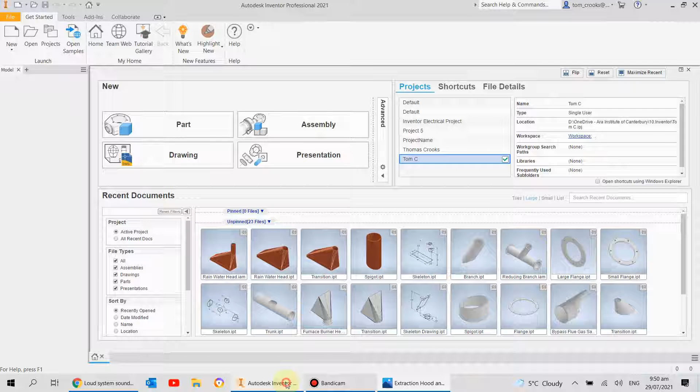This one shouldn't be too difficult, so what I'll do is go to Inventor, start a new sheet metal file, and I'll just break with habit here and change the thickness to 1.6 already.

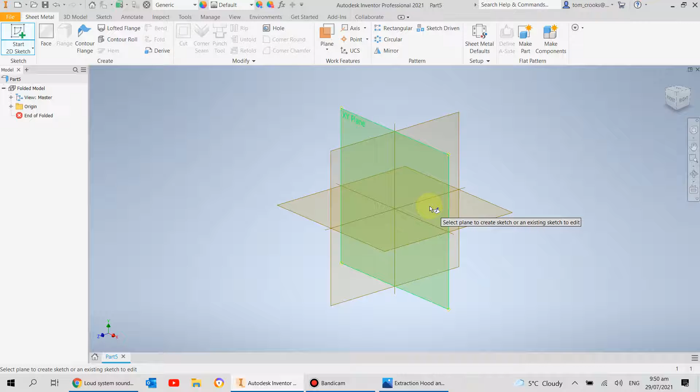Now what I'm going to do is draw a bit of a side profile, just so I can get the angle right for that plane up the top. We've got it 600, and 347 to the center of this spigot, which is 125 in.

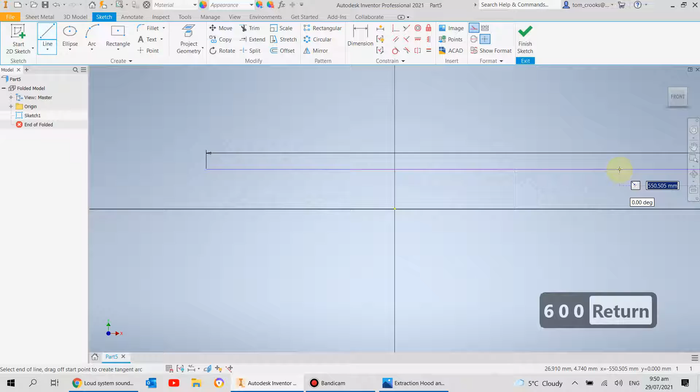So let's draw a line, I'll draw a construction line and type in 600. Zoom out a wee bit, and constrain the middle that way and that way.

Now I'm just going to draw a line for making a plane. I'll draw it approximately there, so it looks something like that. And I'll do 125 to the center of that line and 347 up.

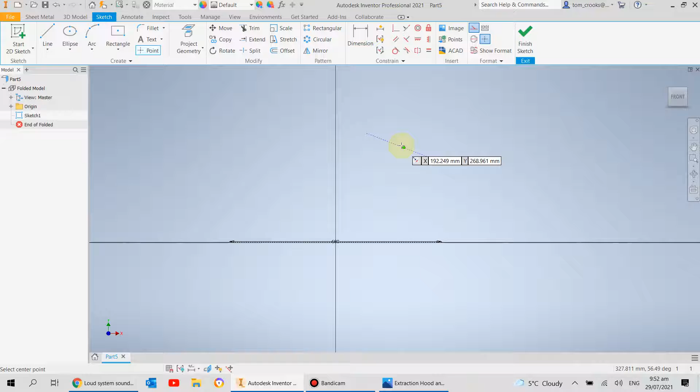What I'll do actually is, since it's not easy to pick up on the center here, I'll dimension to the edge instead. So we're talking about a 250 OD and 125. That is flush at the end, even though it doesn't look like it, so we'll just flush that up.

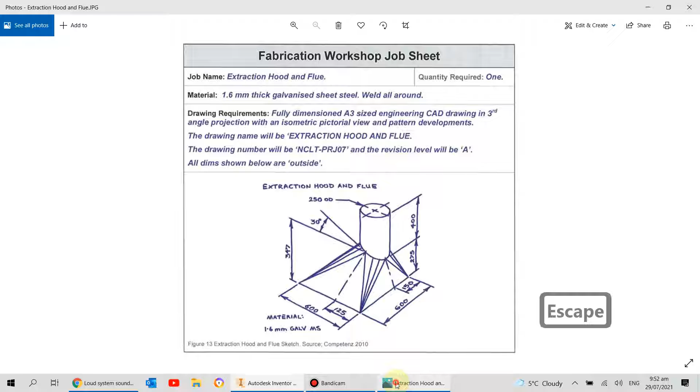Like that. And I will draw in a center point here, I'll just do a wee point. There it is. Just so I can dimension to the point.

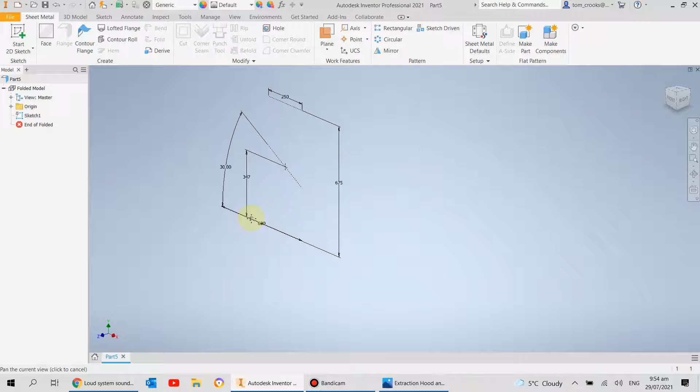So I'll go from that point to here, that measurement was 347. And the angle here is 30 degrees off flat, so let's put that in there as well.

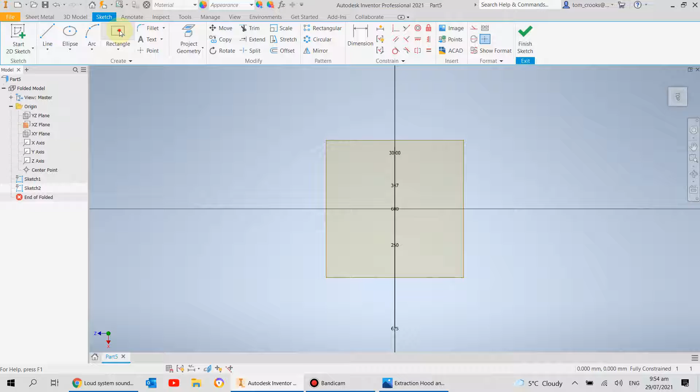I'll leave it at that for a second. Now I'm going to draw one more line across the top here, and flush up that end with the rest of it.

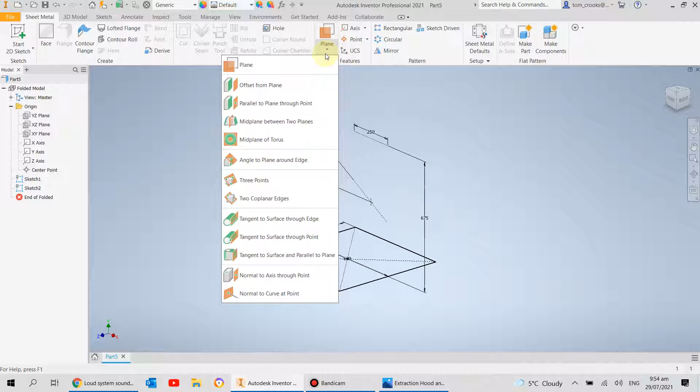And the overall height of this thing is 275 plus 400, so 675. So I'll go there to there, 675. And we had a 250 OD, so I'll put that as 250.

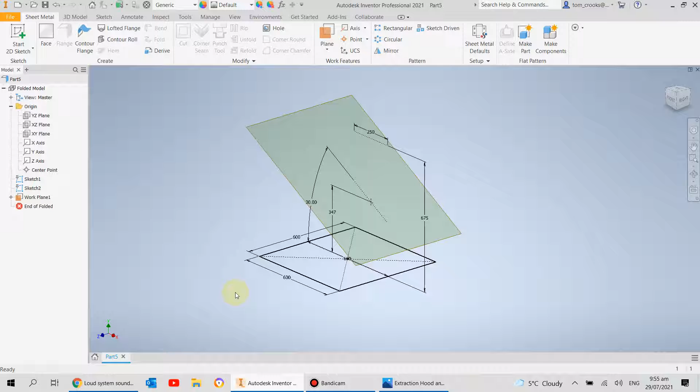Now what I can do is put a horizontal constraint here, a vertical one, and you can see that all lines up there, and that's on a 30-degree angle, 347 at the center. So that's good.

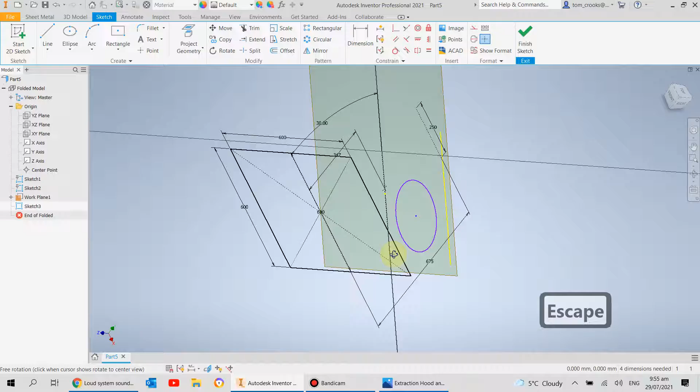Now what I can do here is finish the sketch, and now I can do some planes. The bottom one is already on origin, so I'll just highlight this one and sketch the bottom face. The bottom face is 600 by 600, and that's outside sizes.

Sketch on here, center point rectangle, 600, 600. So there's the base.

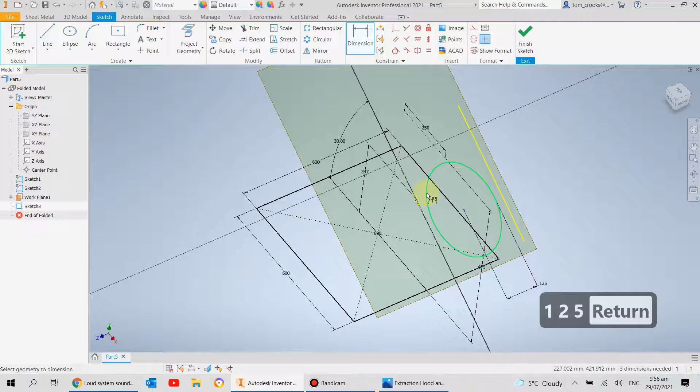Now we get a little bit trickier. I'll turn that off just for ease of view. I'll do an angled plane around the edge, so that's my edge, and I'll do an angle to this plane of 90 degrees. And what I need to do here is look at the drawing again.

So it's 150 from one end. So when I draw the center of this ellipse, it's going to be at 150. So I'll go back to this and I will start a sketch here.

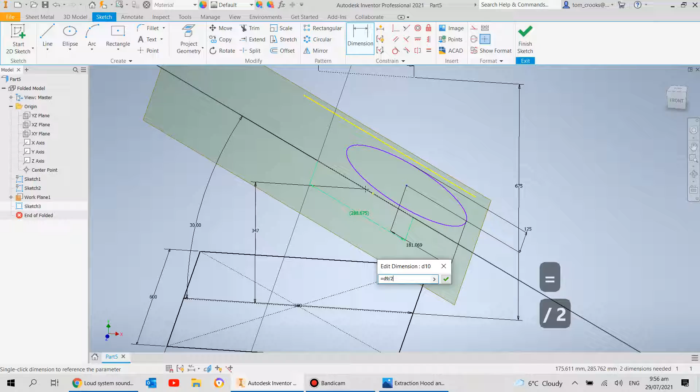And I can project the geometry, so I'll go here. And what I'll do is just roughly place an ellipse in here. It's going to look something like this.

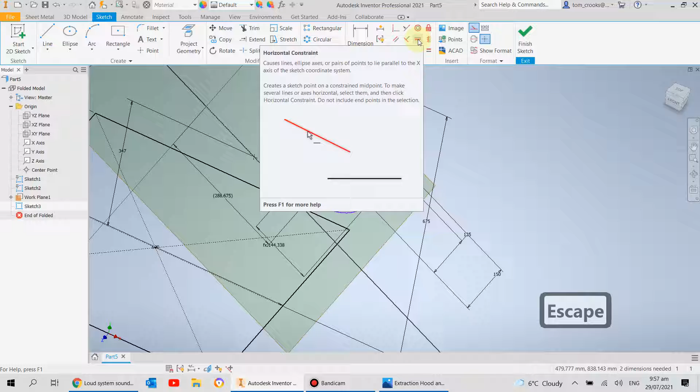Now I'm going to rotate around to see what's going on. And what I'll do is give this a dimension on the minor axis. What size pipe did we say? We're doing a 250, so 125.

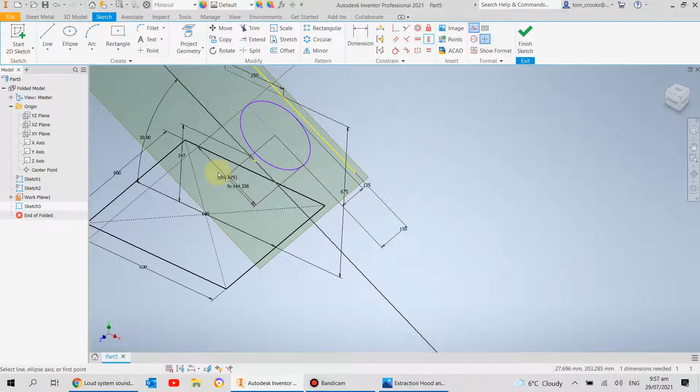And I will put it on the side just to make it a bit easier to see. Rotate around again, so I'm just getting a good grasp of what I'm doing.

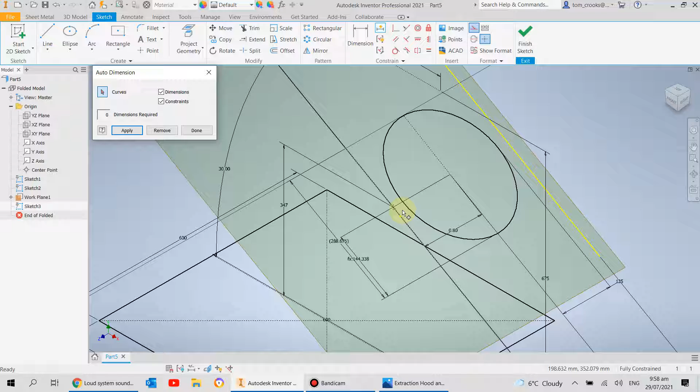Now, dimension. What we can do is we can project geometry, and we can then check this dimension here, 288.675. I'll accept that, and I'll go here, dimension it out this way, and I'll say it equals that divided by 2. So now we've got the right size, and now we just need to

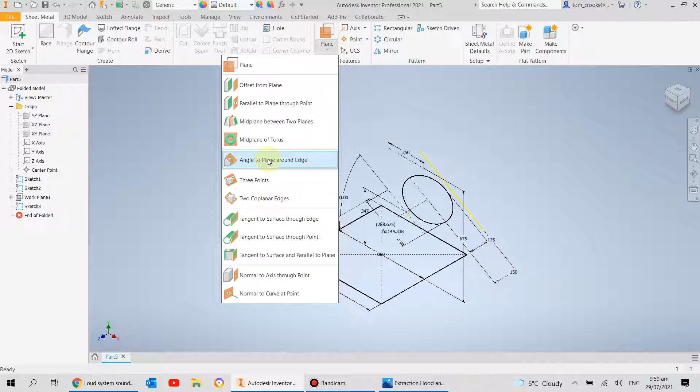constrain it to the right point. So I've already got it, no we don't, so I need to do 150 off that outside edge there, as it says on the drawing, 150.

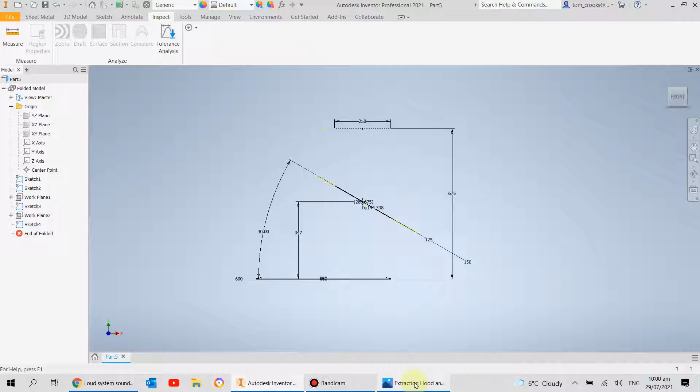And what I'll just do here is I'll do a construction line, and I'll do that up just to the top. This is just something, so I have something to grab onto, and it may be horizontal, vertical, but I'll grab that endpoint, and I'll try and make it horizontal to the end of that line there, which is there.

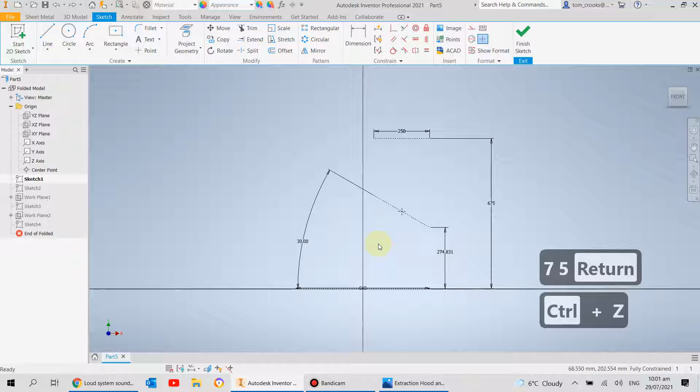So it must be on vertical that we want. That one to that one. Now you can see if I turn it around this way, everything's along that line, and it's 150 from the edge there.

Just go back to the home view, and it's still saying one dimension needed, so I'm not too sure what it wants, so I'll just go up to auto dimension here and see what it does.

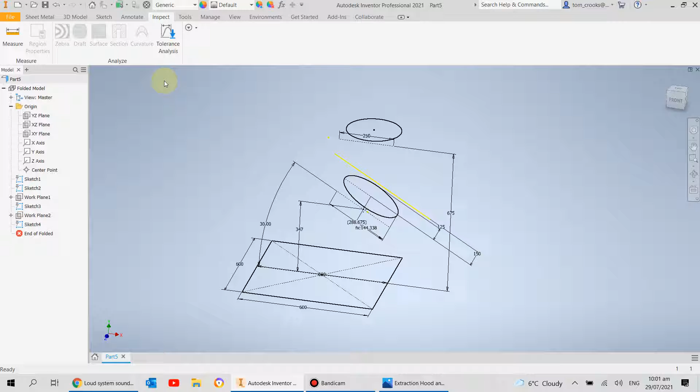It wanted to know, it's on a slight angle for whatever reason.

So, whoa, that was loud.

So what I'll do is I'll make sure that's parallel to that one. And there we go, now it's happy.

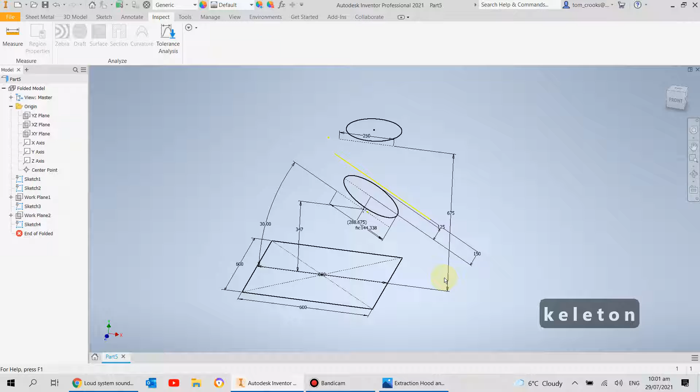So I'm just going to zoom back out a little bit. Turn off this work plane.

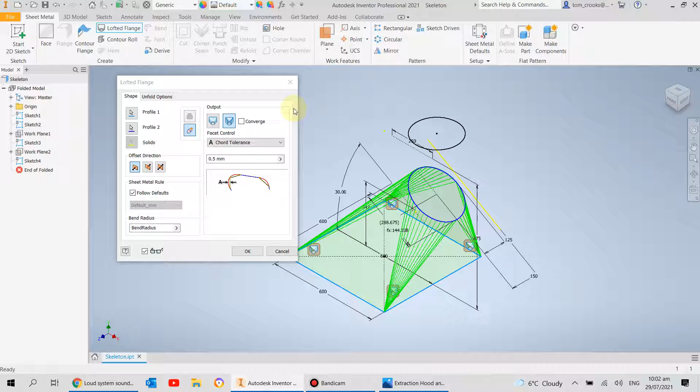And now I will go and do one more plane across this one. So I'll go angle to plane around edge, that one, and 90 degrees to this one.

And I can start a sketch on this top plane here. Now what I should be able to do is project this straight up.

And also what I'll do is I'll just draw over top of it, because sometimes it doesn't like using projected geometry and sheet metal for doing lofted flanges. And we'll just have a look at that.

Take the visibility off, sort of clean it up a little bit. So everything's in line, 675 tall overall.

Yes, yes. Right, everything seems pretty good there.

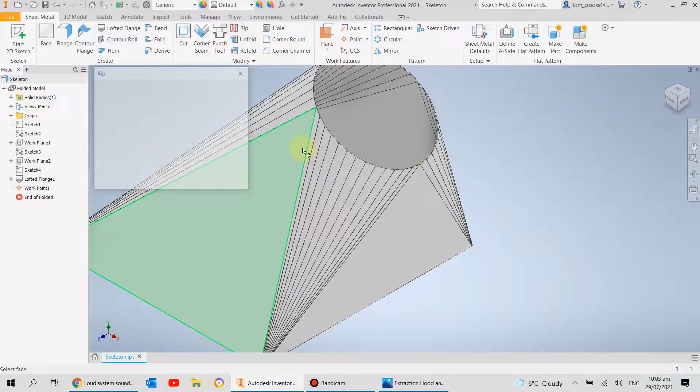So we've got 347 to the center, so that says 275 to the edge. So we'll just check that and make sure it all adds up.

So that doesn't add up. So what is the reason for that?

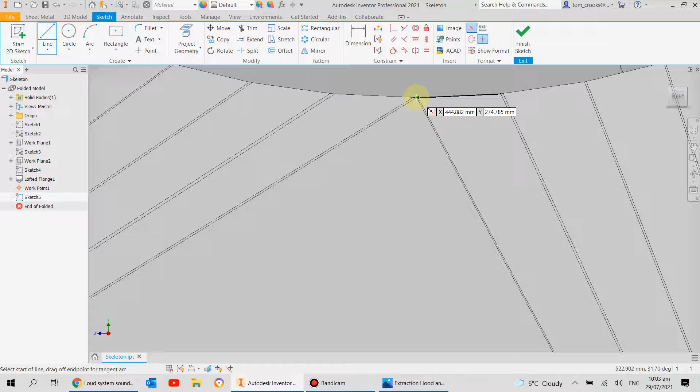So what I'm going to do is I'm going to assume that 347, although it looks like a straight up and down measurement, it must be on an angle.

So I'm going to come back here and I'm going to delete that. I'll go back into sketch 1 and I'll delete that measurement there.

And I'll go along the back and do 275. So it wasn't far out. It was a tad out, so yeah, it works either way.

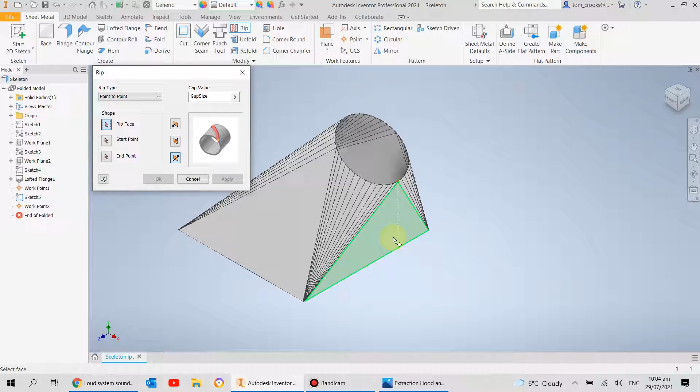You can see it's 274.785. So one of these dimensions can't be completely right, so that's fine.

Right, so it's all good. So I'll just go finish here. And now I have all the faces that I need. So I'm going to save this.

And this is the extraction hood and flue. So I'll save this as the skeleton drawing.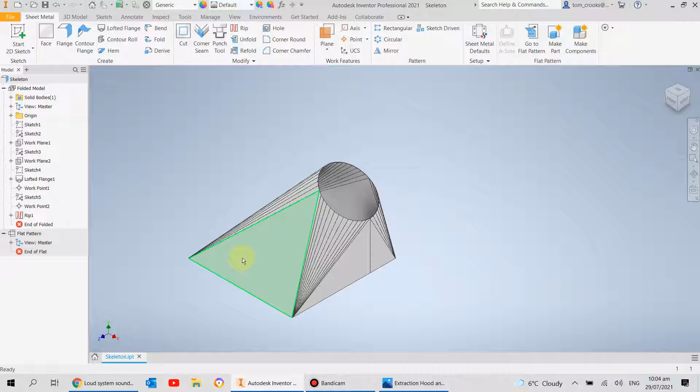Now, if I go back to the drawing, it says all dimensions are outside. So I'm going to do a lofted flange up here from that point to that point, and I am going to keep it in that press brake style.

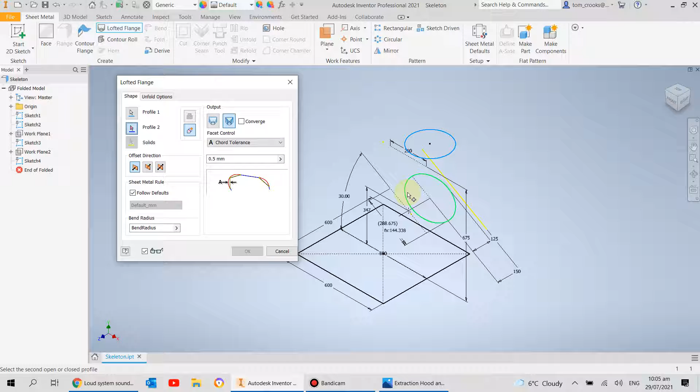I'm just going to check and make sure it's going to the inside because we're using all outside sizes here. So it's inside the square I've drawn, but inside that ellipse as well. And we'll go, okay.

Right, so now what I'm going to do is I am going to just rip it down the middle, and I'm just going to keep this as one pattern, just for ease. It just should be easier. I will also turn a few things off that I don't need to see at the moment.

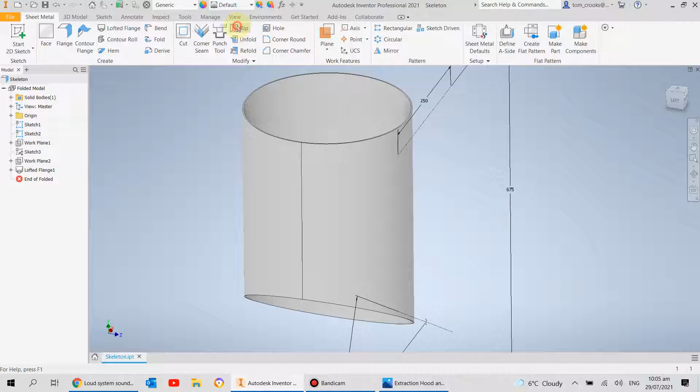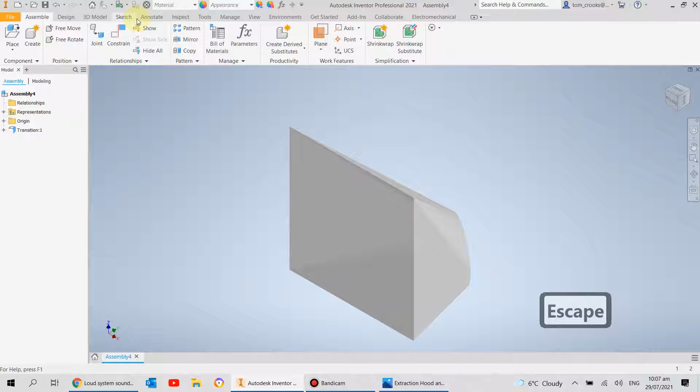And I will put a point, make sure there's a point here, that top point there, yep. And I'll go rip, and we'll see, it may do it on an angle, so that's not really ideal. So what I want to do...

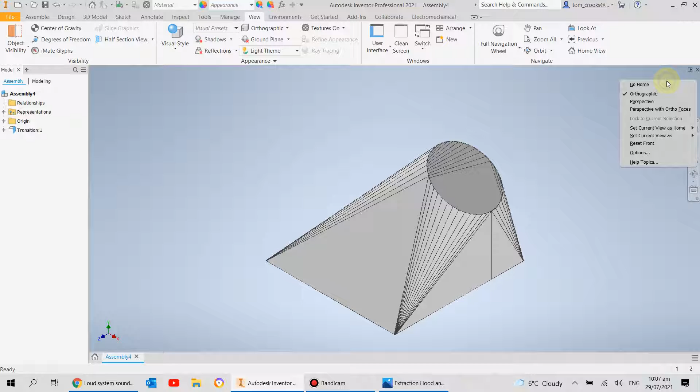Back out, and I'll start a sketch, and I will do one on here, and I'll just do a construction line from that point. May need to project the point first, then do a construction line from that point down straight, and I will make sure that ends down the bottom. So I'll go there to there, and I'll finish that sketch.

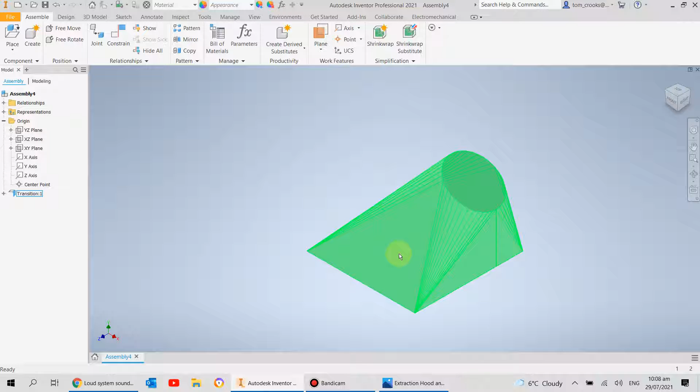Now I'm just going to put a point at the bottom of that line, so it rips straight up and down. It would make more sense to do it that way. It's a much shorter weld than, say, welding all the way down that seam.

So if I go back to rip and do a point-to-point rip, select the face, start point, and the end point. We have a nice straight line going down, which is much better. And a small gap, 0.1.

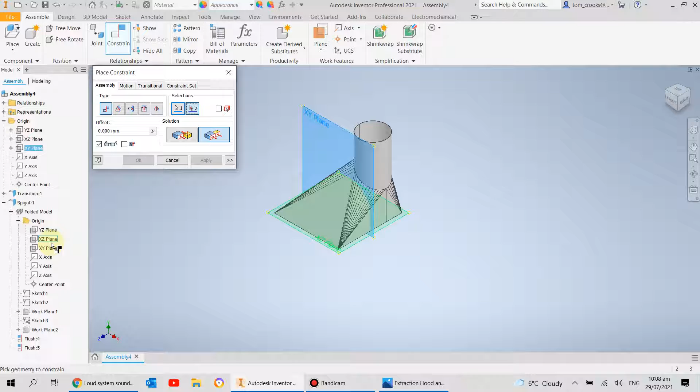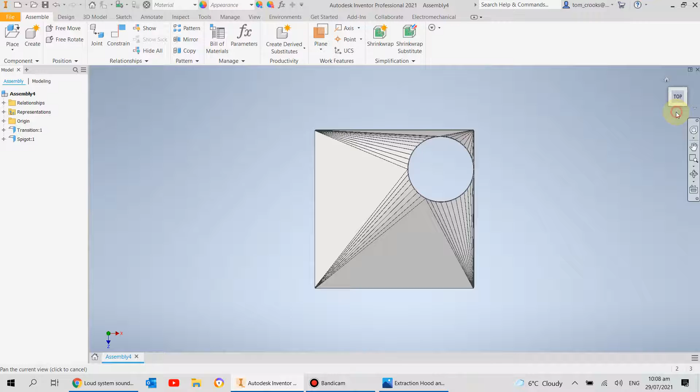Now I'll just turn off a few things to make it easier to look at. Now, I should be able to generate a flat pattern of this one. And there you have a flat pattern. So you could put another rip down the other side, and then generate two patterns for it. But it's just a little bit more difficult, so I don't really need to do it for this one.

What we'll do is we'll minimize this, and I will save. And I'll save that as the transition. Close that one down. And we'll open the skeleton drawing again.

I've got that open. Lofted flange from here to here. And we'll make it a smooth output, a die-formed output. And inside the line, because it's the outside diameter.

Now, see how it sort of put that little line in there already, so it should rip perfectly fine. So I should be able to just go rip there, there. Sometimes it sort of picks up on where the seam's going to be, and sometimes it doesn't. But it just happened to pick up on it there, so we'll put a wee rip in it.

Just going to turn off the visibility of things I don't want to look at, and just have a look around. Yep, it's looking alright. Should be able to generate a flat pattern now. And there you have it. So that's the spigot, so I'll save that as the spigot.